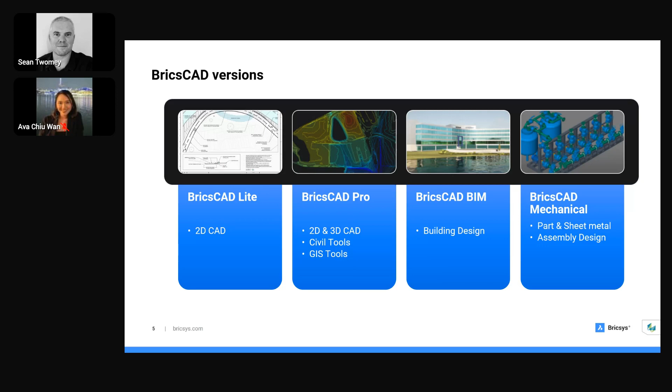With that in mind, let's talk about local government and what it means. As I said, I'm based in Australia, so I work most closely with Australia and New Zealand, but I'm very aware that we've got a very broad audience today. Even within Australia and New Zealand, there are some significant differences.

We've got district and city councils in New Zealand, but local government also includes regional authorities who manage things like water networks and general services. Whereas in Australia, government is divided into federal, state, and local. Local government doesn't include state policies, so things like water provision are handled by state government, not local government. There's no perfect formula to cater for everyone's government needs.

What we're doing is showing the concepts, and today's session will be one of the more basic ones. We're happy to do a whole session on water because we have a very extensive GIS platform, and we'll get the opportunity to discuss that and provide feedback.

Moving on, what we're talking about is councils, who take care of everything from health services—we've all had immunization recently from COVID—as well as cultural facilities and community services. What we're showing in terms of road design is just one part of what councils do, and we're very aware of that. We're also aware that mechanical and BIM products are relevant here too.

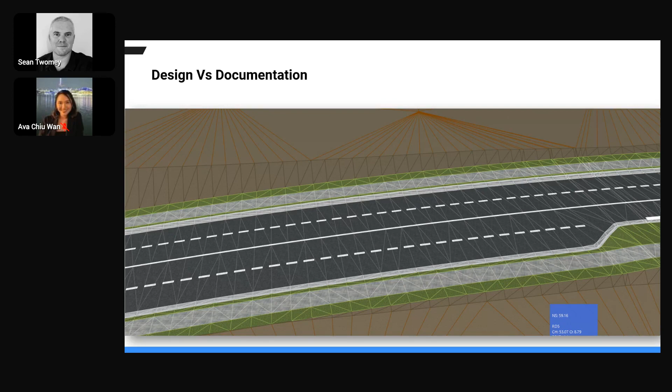If we go to the next part of the slide, we'll see the same information in a 3D format, but all the documentation is obviously in the 2D plan. So standard 2D CAD tools tend to be a very important part of this, and we'll do a demo in a while to show that.

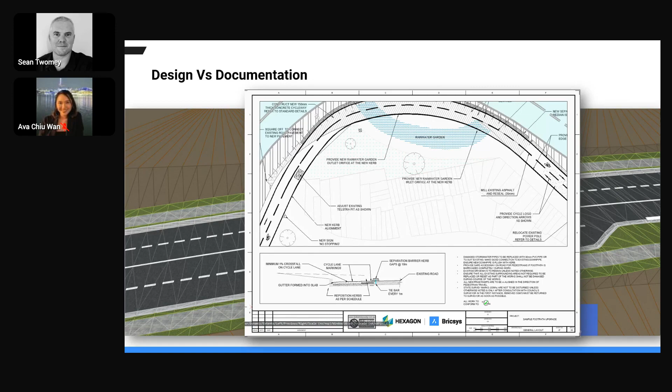But just to position where BricsCAD fits into all this—general usage of BricsCAD, or CAD in general, tends to be based on some very basic features. Probably the 5 most popular things for standard documentation usage are blocks, line types, multi-leaders, and tool palettes, which Ava will show, as well as using snapping tools and polygons, etc. The general fundamentals tend to work through these.

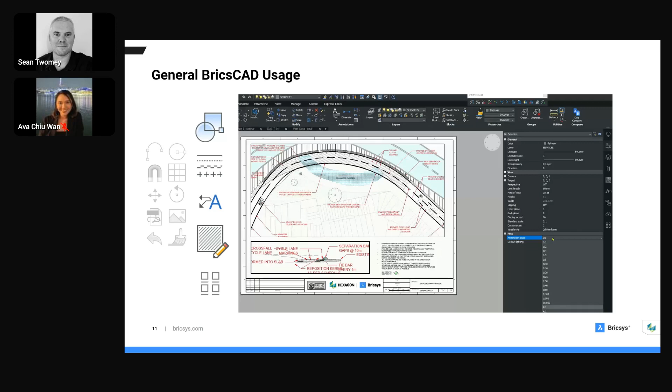Let's quickly mention those—I don't want to spend too much time on the PowerPoint. If you think about line types and layers, we've got a slide showing how we use those. These behave exactly as you'd expect in the CAD platform. What we're showing here are different line types and colors for different services—electricity, sewer, water, etc.—all defined in these layers and line types. We often get asked how we manage existing CAD standards.

So if you've got other CAD platforms, we read DWG natively and we write DWG natively.

So the existing standards port across. We can do a separate session on this, we've done a few of these on how you work with those existing standards, but let's just mention the fact that we can do those. If you want more information, please let us know.

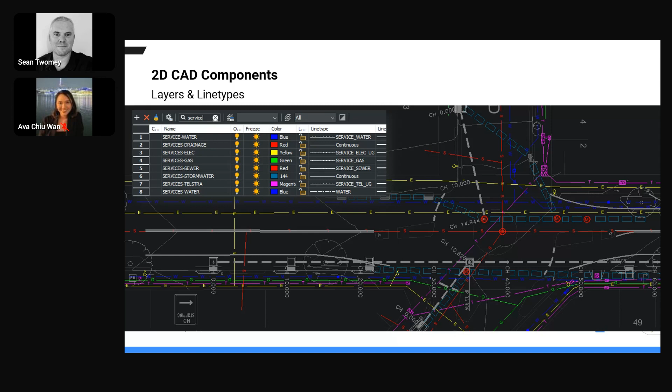In terms of blocks, we've got a few examples on the next slide. You've got a standard detail here from a bioretention. We also have a traffic intersection showing basic blocks for give way signs, standard road signs and everything else. These are obviously going to be different in each location, but the concept of using CAD blocks is native to us. We read those files in natively, so existing block libraries can be read directly, not even imported.

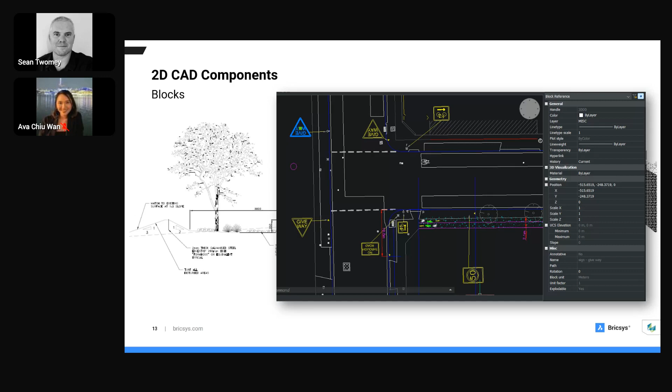The next thing we mentioned is leaders. Leaders are a huge part of the documentation process, and things like multi-leaders with annotative text and all the various parameters around that are a very important part. So we show those and how easy they are to use.

What we find is that sometimes non-CAD specialists want to do a basic site plan or a general layout. The fact that the tools are easy to use and intuitive makes a big difference, because people tend to have the knowledge and just think the CAD platform is a bit too complex if you don't use it every day. So we make sure we build up palettes, which Ava will show in a second, to make that easy.

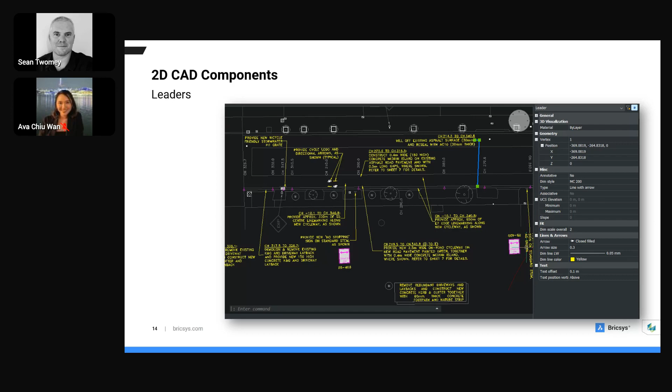Again, they port across from other platforms and behave exactly as you'd expect. The last thing we'll mention before turning over to Ava is that viewports work. When it comes to plotting, we could do a whole session on how we manage sheet sets and various types of CTB files, which all come across. But let's just mention here that viewports work as you would expect, and we can easily do various scaling options as well.

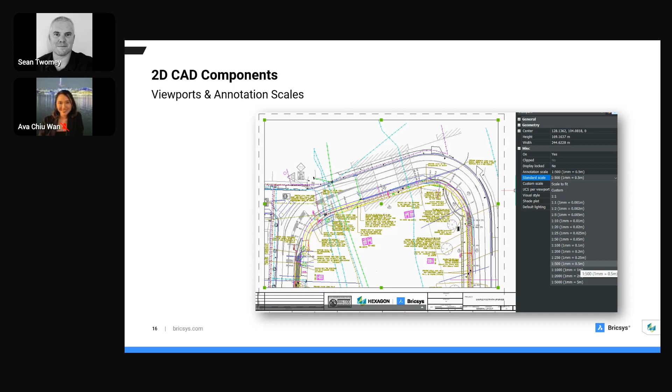So let's move on to a quick demonstration. Just to frame this, the scenario here is that rather than doing a full CAD output and drawing everything manually, we're going to take an aerial photograph and highlight which areas of certain footpaths or cycleways need to be maintained, upgraded, or dug up and redone from scratch. It's a classic scenario where people have the knowledge in their heads and need to know how to put this down in a CAD platform.

The reason we're showing this is that we've seen people go to Google Earth imagery, take screen captures, and put it into things like PowerPoint to draw on it there. That works, okay, but it's easier to do in BricsCAD and more accurate, and you get a better result. So with that, let's ask Ava to take the stage and take us through this presentation.

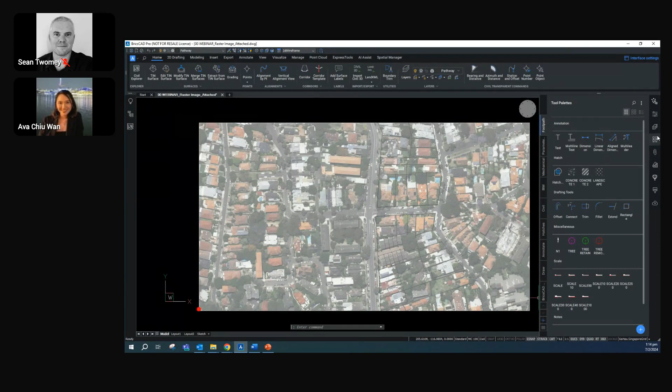I want to start with an aerial photograph that I have attached in my drawing using the image attach command. If we launch this command and bring in this raster image, we have options available like adding geocoding information, or you can also specify your insertion point, scale, and rotation.

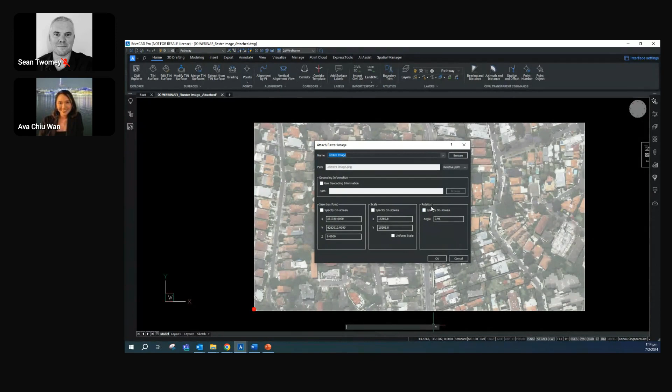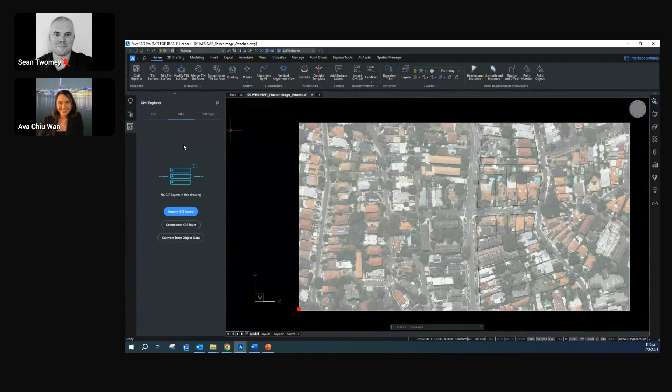Going back, say you have GIS data for this area and you want to bring that in for reference. You can also import your shape files. In this case, I have my road network, so I can just bring that in with one click, and the data comes in as expected.

So when does this become useful? Sometimes you also have your utility lines like electricity or telco lines, or maybe even water lines. You can bring in those shape files too, and this will be useful for your alignments or coordination with other departments or contractors.

If we go to the GIS tab in the Civil Explorer, we can open this roads layer and see a consolidated table of the GIS information that we have. For this one, we have the names, the classification, and the max speed available.

If you want to filter this, you are also able to do so in BricsCAD, and you can stack your filters here as well. It works with an AND and an OR function.

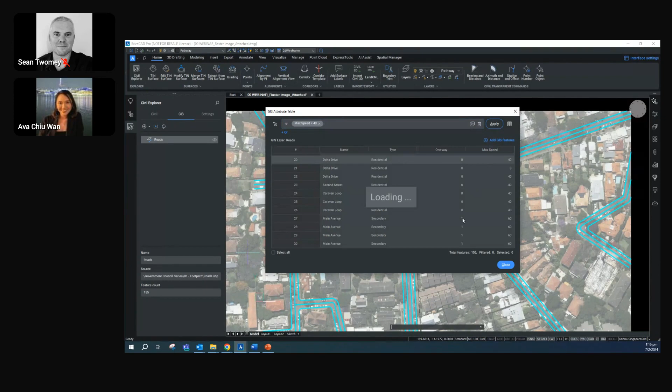This will be quite useful if you want to sort through your data. As we all know, perhaps your GIS data can vary with maybe 100 or even thousands of entries in a single layer, so once we do that, we can easily sort through our data here.

So we have here some lot boundaries on some of these areas where the footpath reconstruction will be.

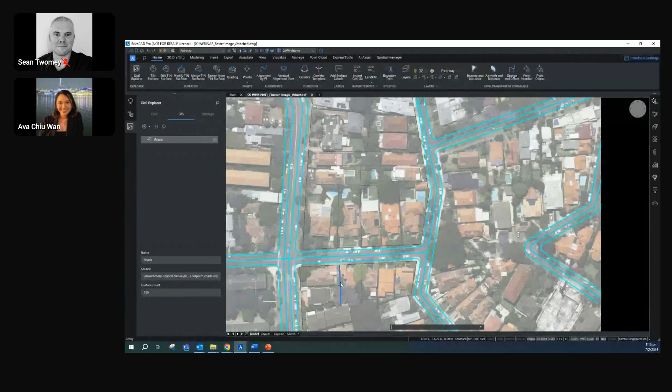You can further ease your workflow by creating your own customized tool palette in BricsCAD, like what I have done here. We can create this according to the usual tools we will be using for our workflow to make it more accessible.

We have here some annotation tools, some hatching tools, some drafting tools, which will be very handy in a little bit. And of course, we also have our scale bars, amongst other things.

You can easily add your text, your separators, and create new palettes, and even customize your palette here. You can also add your tools from here as well.

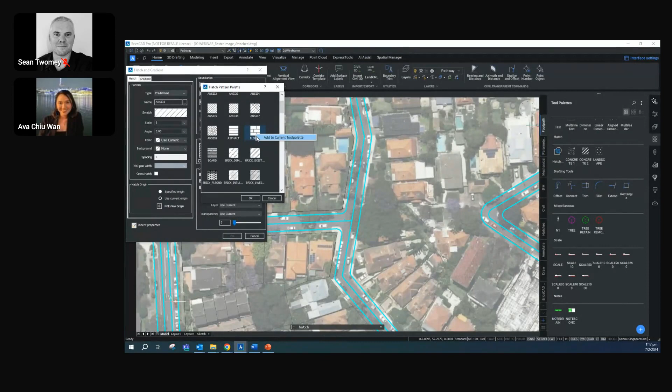If we go to our hatch tool and look at the swatches that we have, maybe the brick hatches will be quite useful for today's workflow, so I can easily add that into my current tool palette. You see it is now added here, and I can drag that in together with the hatches and all my other hatch patterns.

Because we have GIS data attached to our data, when we click on any of these lines and go to our properties panel, we can see the GIS data attached to it. From here, we can easily identify what street we are working on and add in the corresponding labels for our sketch plan. For example, we can see that this is 2nd Street, and here we have 10th Avenue, so we can proceed to add in our labels with our text.

In this case, we know that this is 2nd Street, so we will just label this accordingly. I'll add in 2nd Street over here.

Let's try another one where we want our text to be parallel with the street. For this one, I'll just specify this as my rotation angle and then proceed to type in my label as well.

Let's first turn off the visibility of our GIS layer so we can focus more on the detailing of our footpath.

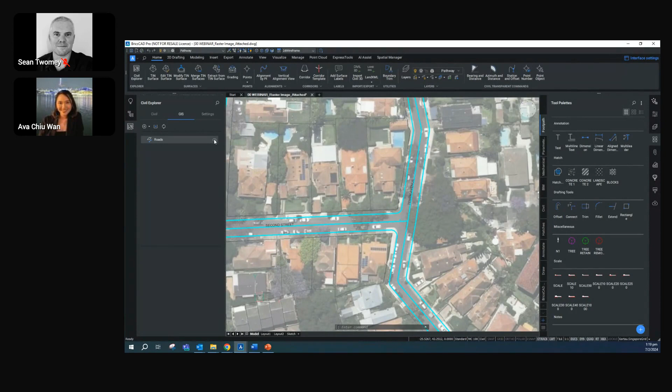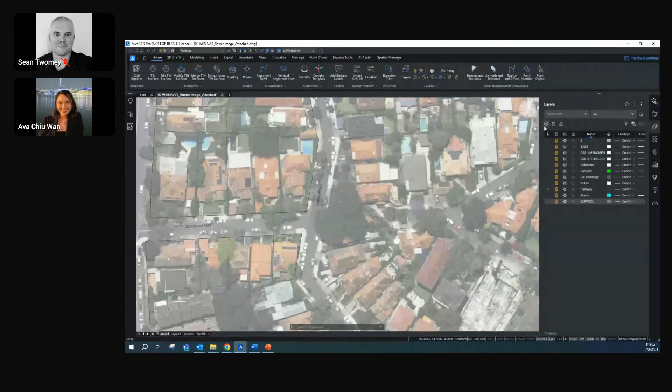Now let's check on our layers to make sure that we are drafting on the correct layer so that we can easily sort out our elements. I will use pathway as my layer and proceed to do all my details here. Of course, if you want to add a new layer, you can also do that in this panel.

Now we can use the lot boundary as our guide for the end of the private property and the start of our footpath. Depending on where you are across the world, the minimum width of a footpath can vary from around 1 or 1.2 meters to 3 meters or more, especially if there is also a cycling path provision. Assuming that for this street, the design states that the footpath shall be 2.4 meters.

So we will do an offset of the lot boundary by that much, and I'll do that on these sides as well. Since we see that this is probably a primary road, perhaps this might have a footpath that is wider, maybe around 3.5 meters. Let me do that again here and once again here.

So let's connect these corners and make it rounded using the fillet tool. Just select these two and do that once again to the other three corners that I have over here.

Again, I will use the lot boundaries as our guide, and we can use the extend command to extend these lines as our basis. Notice that as I hover over the line that I intend to extend, a blue line comes up as a preview, so we will have an idea of how it will appear.

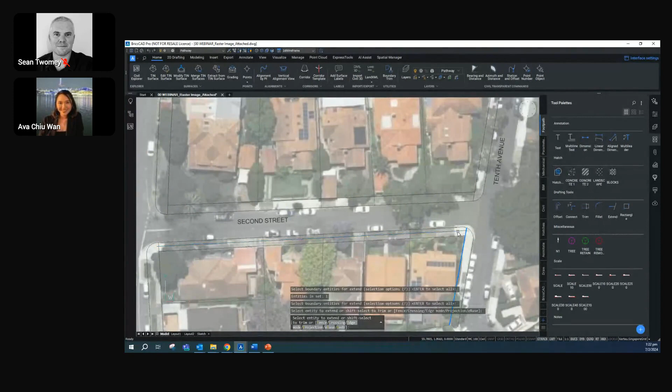And if I want to extend this further, I can also do that simply by just using my tool palette over here.

All right, so before we start with the hatch pattern and labels, let's take a quick look at this legend that I have over here. As you can see, these hatches will probably be used the most in our workflow, and we have added these hatch patterns over here in our tool palette, rightfully so.

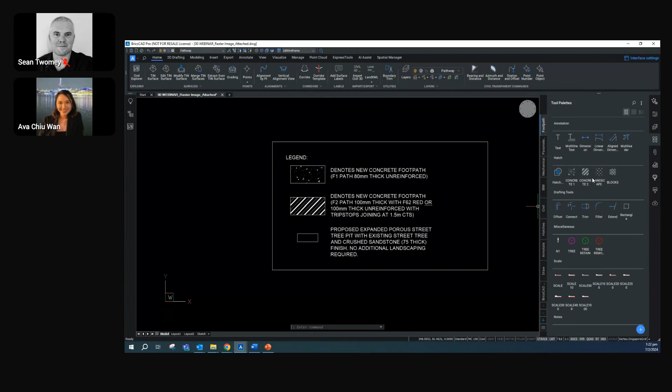So I will add in some lines as my markers, especially on some of these driveways that would not be included in the reconstruction. I'll just add some lines over here, and I don't have to worry about making sure that these lines will be perfect, or that I'll be able to close these lines perfectly.

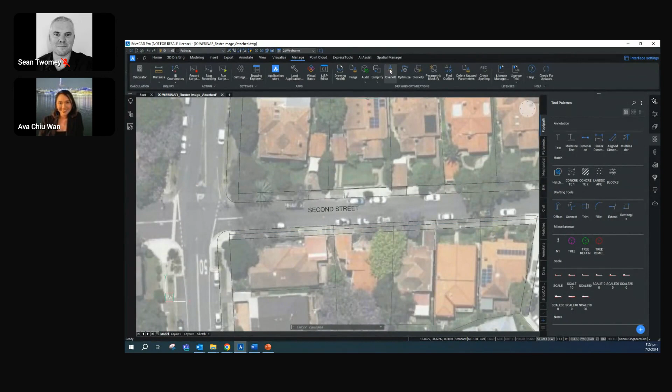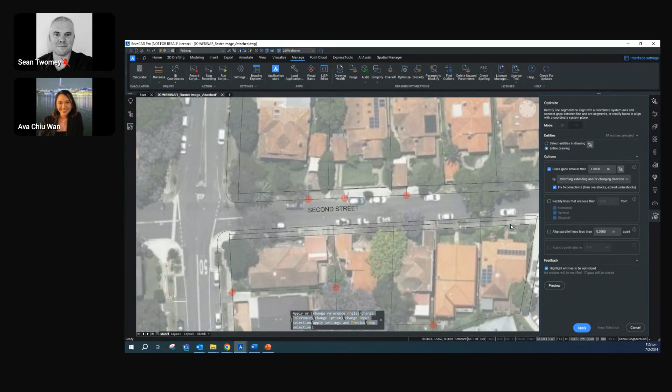Because we have drawing optimization tools in BricsCAD, like the Optimize tool, this can take care of my open gaps or some other skewed lines, depending on what imperfections you have in your drawing. It can easily identify the gaps or misalignments based on the tolerance level that you specify, and this will help us rectify these things.

As you can see, based on my tolerance level, it can see that 17 gaps will be closed, and this will highlight the items that will be closed for easier identification. So once I hit apply, you can see that there are 17 gaps that have been closed now.

So let's say that based on the discussions that we've had with other departments, it has been agreed that these areas will be an F1 path, so we can go ahead and add that hatch pattern in. Just easily select these, and we can easily add in our hatch patterns here as well.

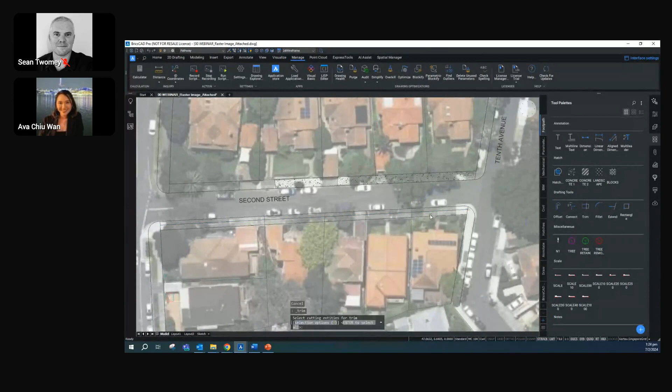So for this side, since this is an existing verge, I would want to trim some of these items as well. So if I want to trim some of these, I can easily do so, and then proceed to add in my hatches as well. Let's say for this side, some of these areas will be an F2 path, and some will be an F1 path.

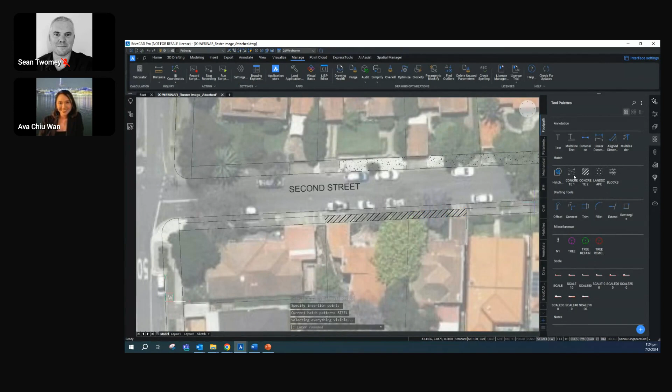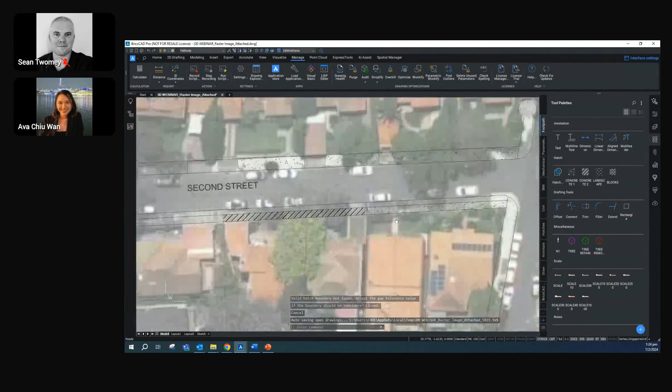So I can just easily do that in BricsCAD, and it's very accessible. I no longer have to go through the hatch command, since all my tools are already in my tool palette.

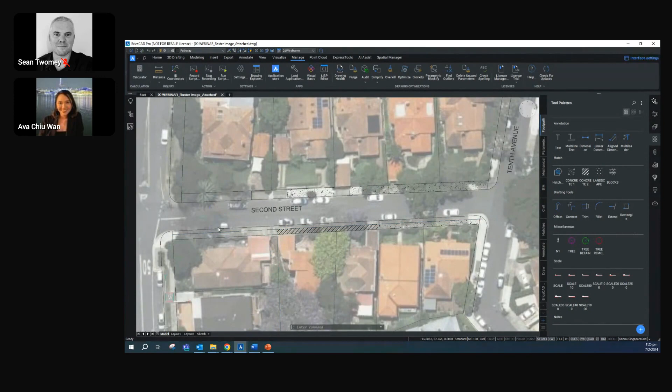So we have, as you can see, there's a number of existing trees that we have here, and we need to determine which ones are to be retained, removed, or any proposed alterations to be done. So we can start with the proposed tree pit for existing trees.

If you notice, the boundaries that we have here are not really parallel to the X and Y axis. So we can use dynamic UCS and lock that in to make sure that our tree pit is aligned with the boundaries. Using the dynamic inputs, we can also input the dimensions or the areas of the tree pit that we have. Let's say we know that this tree pit will be about 3.5 meters by 1 meter, so we can just add that in here.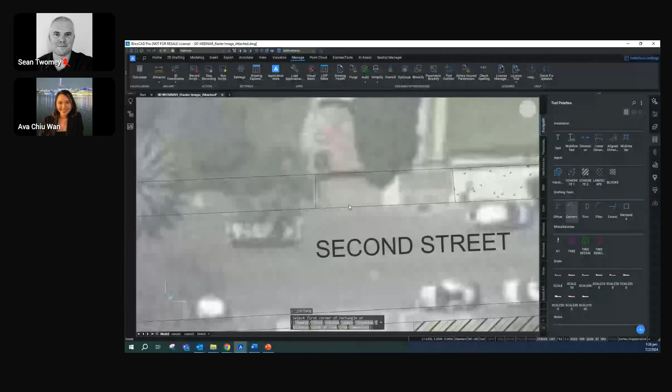Let's try to do another one on this side, again locking in the dynamic input. Maybe we have a tree pit that might be a bit shorter, 2 by 1 meter. So we can just add that in.

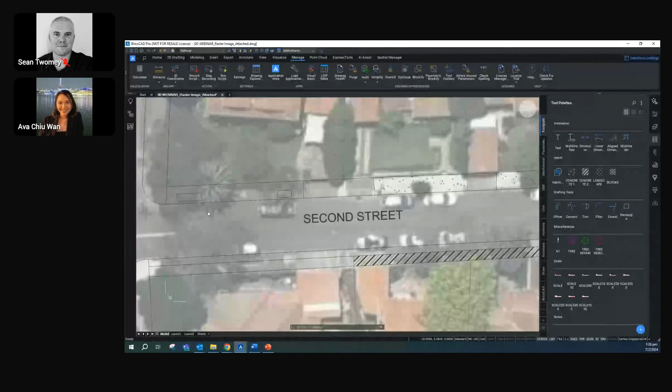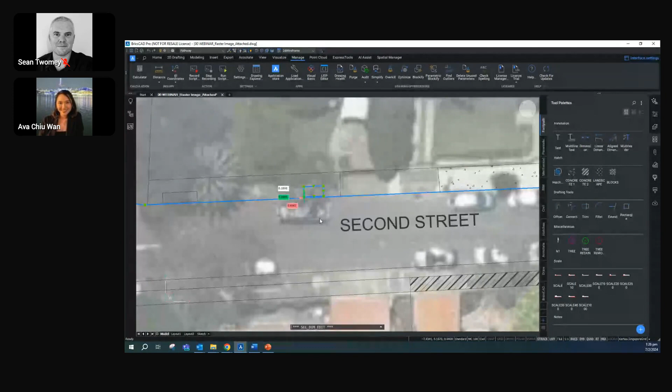At any point, if you want to do quick checks to see if the tree pit is spaced correctly from the edge of our footpath, let's say I want it to be just 0.1 meter away, I can just type that in, and BricsCAD will intelligently move our element over to 0.1 meter away from the edge of our footpath.

So then we can also mark the trees to be retained. And in cases where you got approval of the tree removal, you would also want to reflect that in your plan. Let's say I want to mark the ones to be retained in green, here, and mark the ones to be removed in red. Maybe we have 2 over here.

Since these are not reflected in our legend, we can add labels to help avoid confusion. Of course, the last thing that we want to do is to remove trees that were actually meant to be there in the first place. I'm sure that Mother Nature would not approve that.

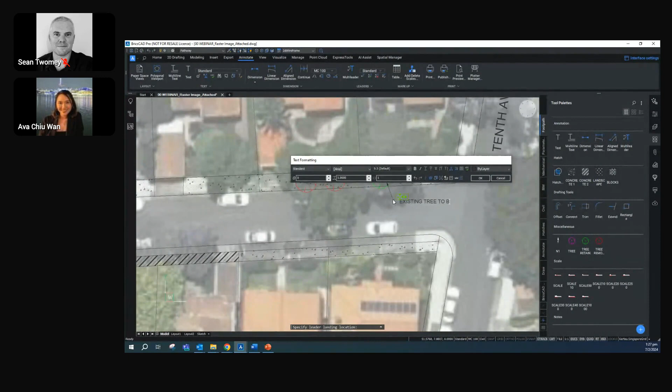So let's add in our labels. Maybe we can say existing tree to be retained. And perhaps for this side, we can add in existing tree for removal.

To minimize our labels, I will just add in a leader for this side to help make it look a lot more organized and clean.

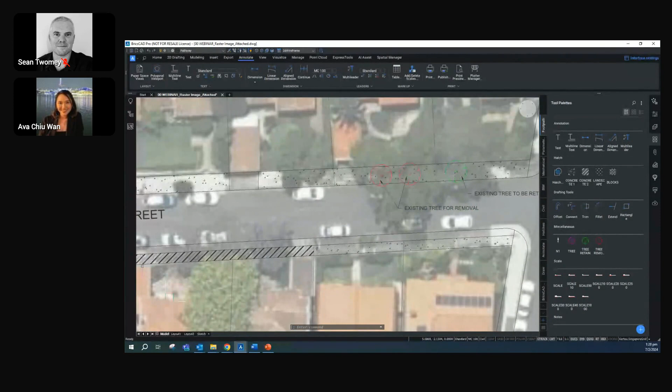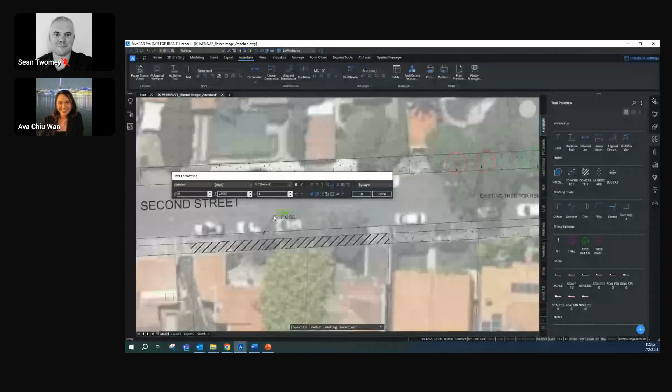So let's wrap up our plan by adding some dimensions and annotations. I can add in annotation here to show that this is an existing verge that will be retained. And they can add in their landscaping as required.

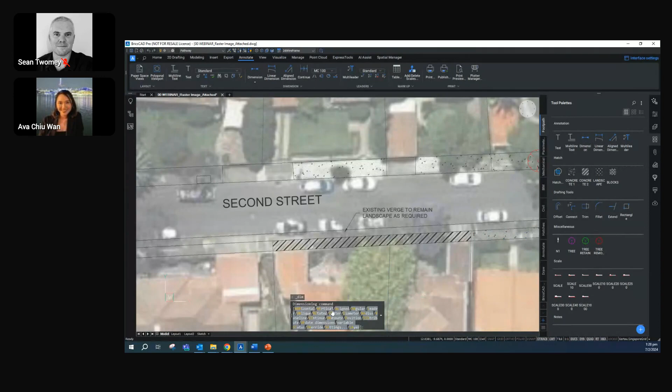Now we can also add in our dimensions. At any point, if you want to change your dimension styles, you can easily do that in BricsCAD as well. Let's say for here, I want to use this dimension style. If I want to change this, I can just go to my status bar and change my dimension as well.

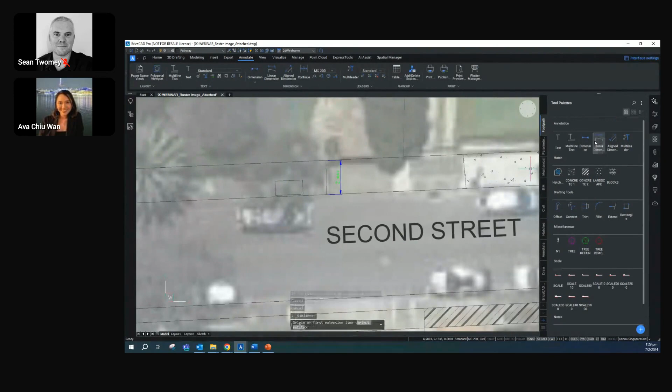So let's try it out. Let's add in a linear dimension for here. And if we want to add in more, we can also easily do that in here as well. If we want to move this around, we can easily do that. It's very, very accessible and user-friendly.

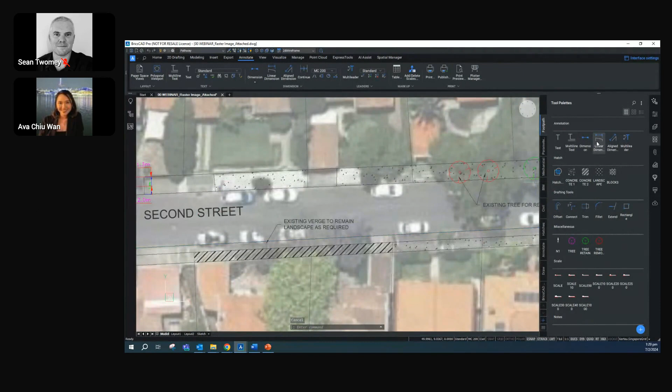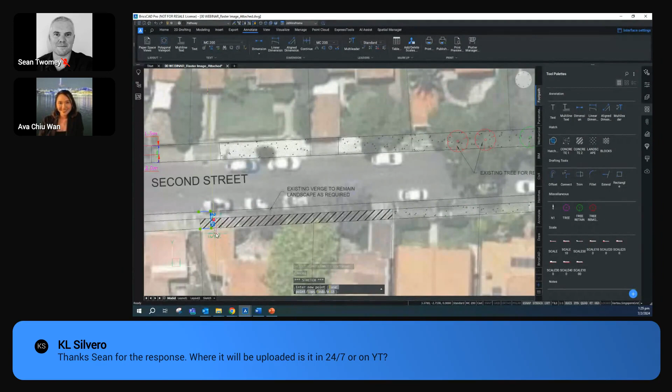So let's try to add in some more dimensions on the other side, just to help us with identification. Lastly, let's add in our true north for reference.

So once we are done, we can move on to the paper space. As you can see, we have our title block here. And what we would want to do is to create a viewport.

You have various options in viewport creation, like the usual standard rectangular ones, or if you need to create 2, 3, or 4 viewports. In this case, I want to create a polygonal one so that I can make space for my legend.

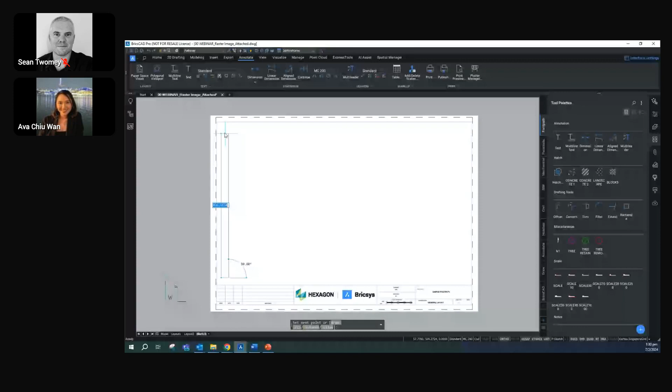So let's just do a quick viewport over here. And you can then proceed to zoom into whatever scale that you need.

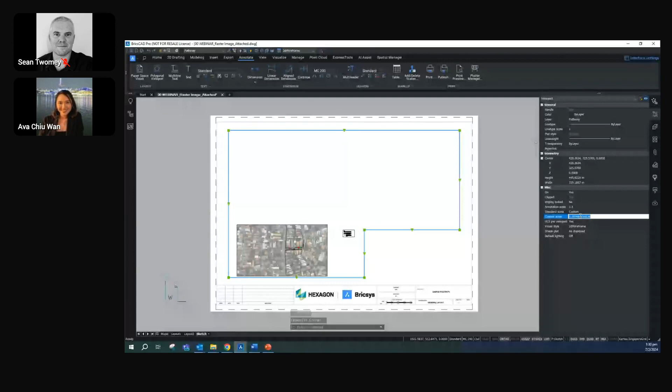Or you can also go to your properties panel and type in a scale that you want. Let's say for this one, I want to type in my custom scale, this will be 1:100. Let me do that again. So here, since we have it here now, we can just type in our custom scale.

And then we can proceed to just reposition that anywhere that we would prefer this to be. So let me just create another viewport for my legend.

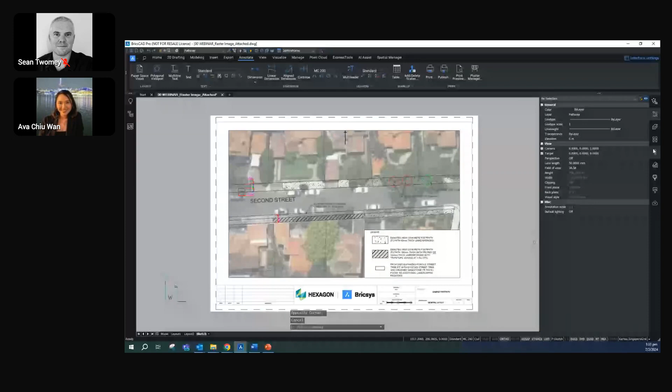So since we know that our scale is 1:100 over here, we can just easily add in our scale bars, which I have also added in my customized tool palette. So here 1:100, and we can just add that into our drawing.

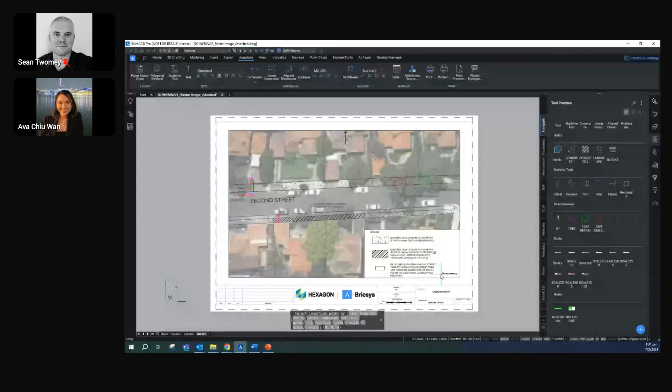Then if you need to print this as a PDF, or you need to plot this, you can easily do that as well, like how you normally would in your workflow. So let's do a preview of this one. And as you can see here, we have done a sample of how it would look like over here.

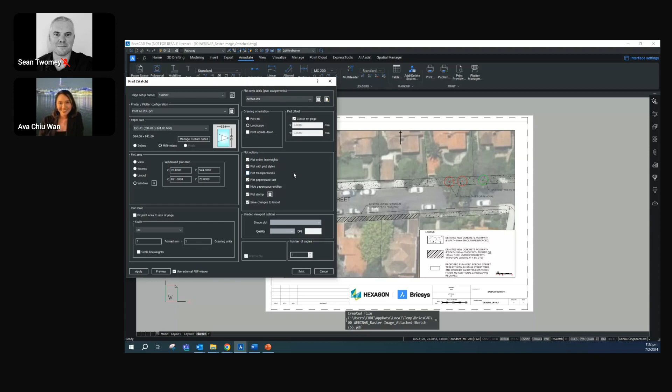Of course, if you have your own plotters or pen assignments or any plotter configuration, you can also use that in BricsCAD according to your requirement. So this is a quick taste of what you can do or how you can create your labels, your hatch patterns for your plans, like your schematics or your sketch plans here in BricsCAD.

So before we move on to the next demo, we would want to have some polls for you guys.

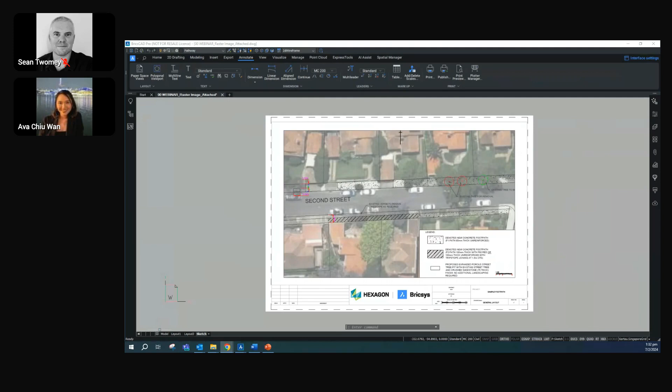Cool, so thank you, Ava. Super good to see this. I think what's most important part of that presentation is the fact that there's functionality that we know exists that can be put into a tool palette. So the occasional users will have a whole workflow defined for them. It's a good example of people who don't use CAD very often having a proper environment to let them do what they need.

So in terms of the polls, we'd like to just ask you a few quick questions to get an idea of what's happening. So let's start off by getting an idea of how often you use CAD. So let me launch this poll. If I go and run this poll here, do I have to open it first maybe?

Okay, so we can see we got quite a few everyday users, and we got a few rare occasions and a few weekly users. That's cool. That gives us a good idea of what's happening. And look, if anybody has other variations on this, please type them in on the questions tab or the Q&A tab, because we're keen to get as much feedback as possible.

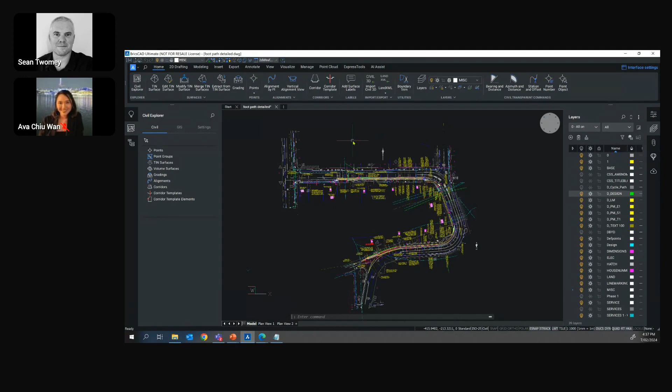This job is a slightly more complex version of what Ava was showing, but it's the exact same concept. You can see it's really just more leaders, more text, more details, but the same process. We're not going to show how we did all this geometry, we're just going to look through it and show some highlights. But the point to emphasize is that once it works for the small job, the same process works for a larger job. It's just a question of putting in more information.

The hard part tends to be knowing what to type in on these notes. We find that people have that expertise already, they just need to know how to access it, hence the whole value of the palettes.

We mentioned, and we saw people said, that they work with civil objects quite a lot. We do have a whole bunch of options for TIN surfaces and volume surfaces, etc. We won't show those today, but they are on the Civil Explorer, so let us know which of those you want to see and we can come back to them.

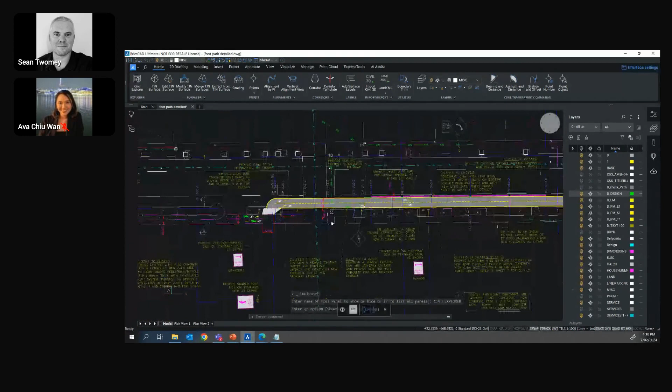Ava already mentioned and showed how the GIS side works. On this file I've got some layer groups set up just to show how things work here. If we look at the strings and services, we can see the GIS layers have already been imported here, so we have the water layer, the sewer layer, electricity, etc. These give us exactly what we need.

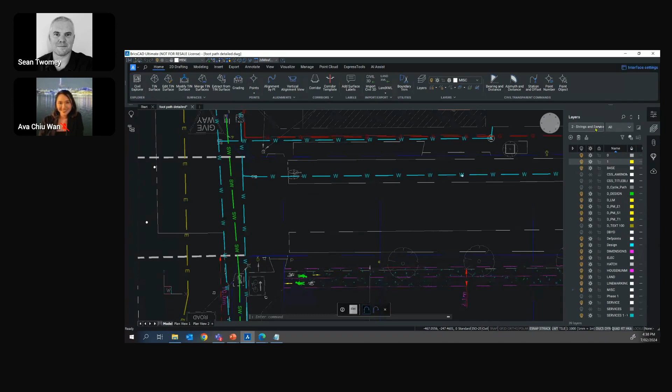We'll also see that the general layout is a road that's going east-west around in a kind of a U shape, and what we're doing fundamentally is adding a cycle lane onto this. So this is our cycle lane here in yellow, which we'll show in a second, and we do have a whole bunch of annotation on this as well.

So let's do a few things here that are not in the standard CAD platforms, because what we were showing earlier was how we do things you would expect to see from a CAD platform. But BricsCAD's got a few unique features that I'd like to show in a civil engineering context.

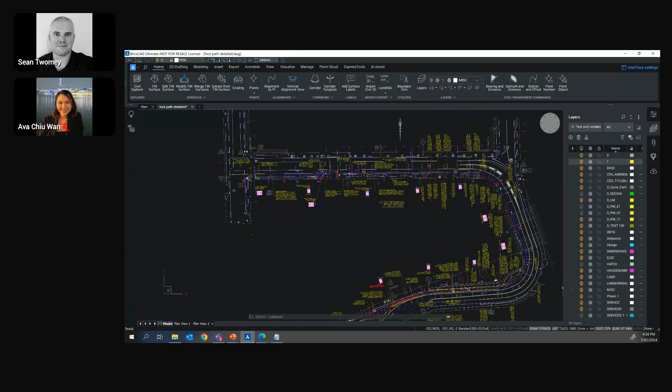Many of you may have seen Blockify and Copy Guided on architectural plans. Let's very quickly run these on the civil engineering scenario. If I go to the outer strings only layer here, you can see we've got a series of geometry types that represent a power pole, but they've been exploded, or it's been scanned from a PDF, and it's all individual lines. If we were to upload this to a theodolite, it would be quite difficult to work with.

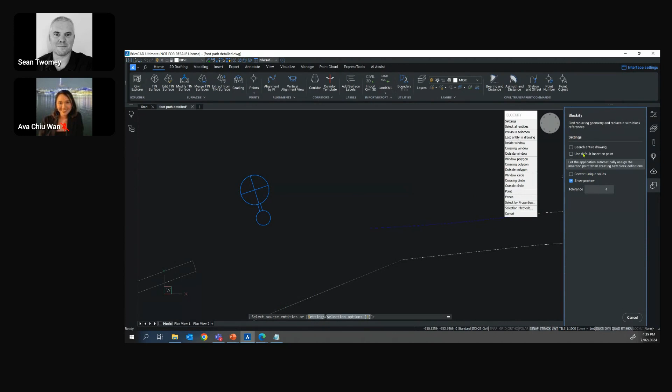What we can do is type in Blockify. This will allow us to select the geometry, and it's going to find all instances of that geometry around the drawing and convert them into blocks. So I'll untick these options so I can type in my own insertion point, my own block name. When I press enter, I get prompted for my insertion point, which I click on here. And I'll say search the entire drawing. The block name I'll use, I'll call it electricity pole 1.

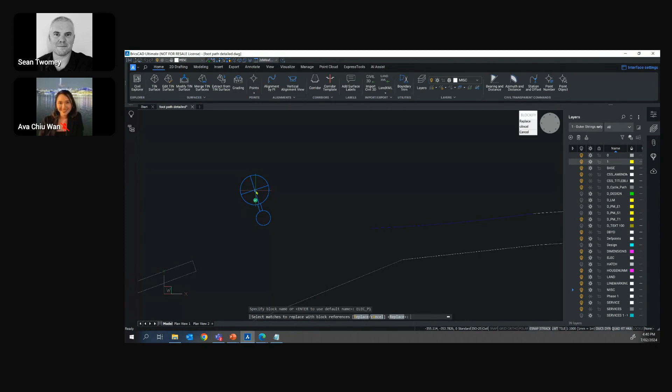So what we see now is the green tick mark on all the instances of that geometry around this drawing. I could go anywhere I wanted here and untick one that wasn't relevant, but you can see how easy it is to now convert all those into blocks. So if I was now to upload this to a theodolite, these will come across as a single point, which is exactly what surveyors want.

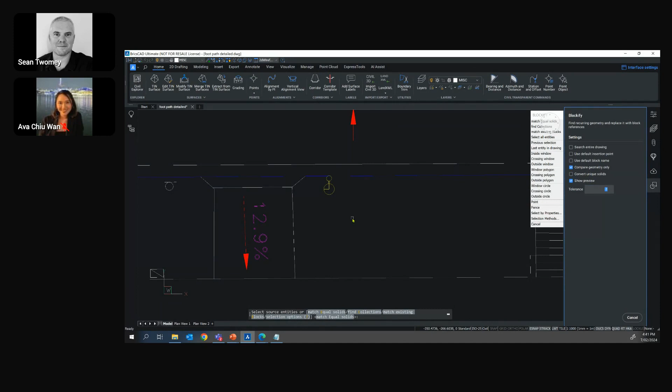That's probably one of the more underutilized functions in BricsCAD. We've got quite a few variations on it, and you can see on that panel, as well as the standard functions for typing in the geometry types, there's also what I call a tolerance factor or a fuzz factor, so that if it's been scanned from a PDF and we need to give it some tolerance, we can allow that, because the PDF scans aren't always completely accurate. That's one of our favorite functions to show.

The other one is Copy Guided. So let's just switch to the cycle lane only. It's sometimes easier to show this on basic geometry. So if this line here was the center line of our road, we want to copy a block or some text along that.

If we run copy guided, and if I select carefully, my item shows up in yellow and my reference object is in blue. So now when I copy here, you will see that as I move around the curve of that road, it is automatically placing the object at 90 degrees.

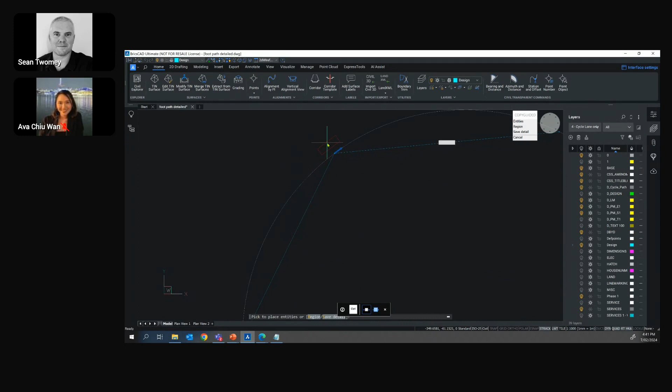So I can put it left or right, and as I do this, I can then change the distances too. If I select my road first and then my object, I can change the offset from 1.4 to say 1.8. That's easy to do with standard tools, but it's quite a few clicks. You've got to snap at 90 degrees and do a whole bunch of easy but repetitive features.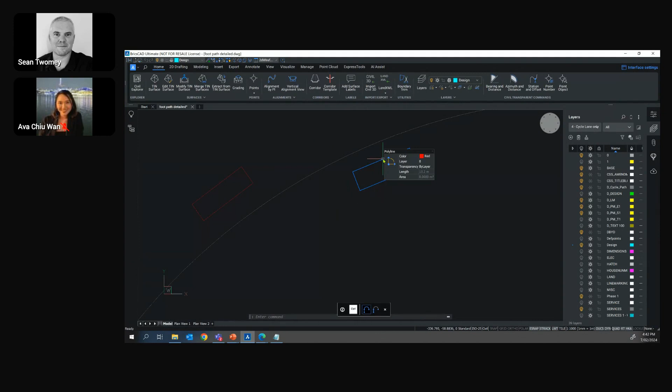And if you're doing these all day long, every day, it's good to have the automated functions. What I'll do next is hold this with a long left click so the manipulator shows up, and now I can drag it along that y-axis. You can see here I can graphically move it at various increments or type in an offset. What it's doing is just picking that local system for us, so I don't have to do my orthogonal snaps at 90 degrees again.

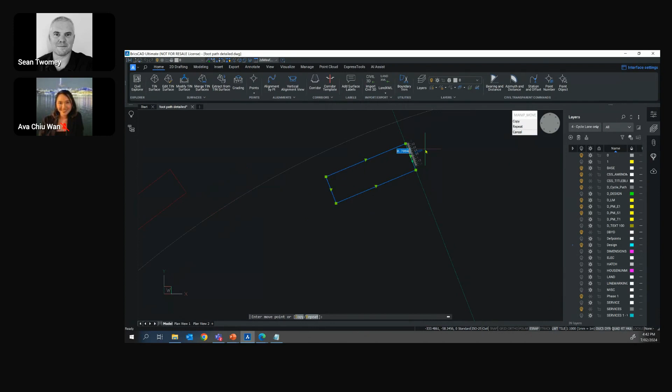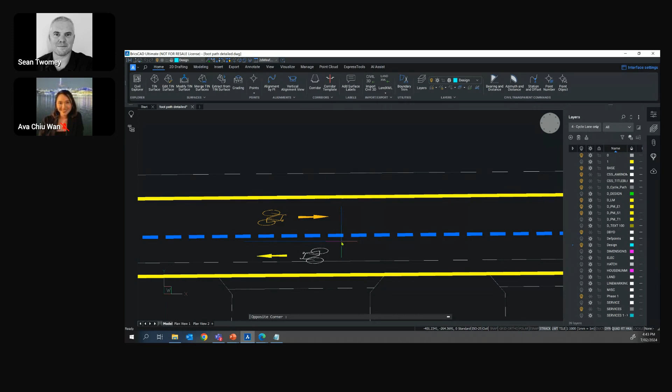So to run that on the actual real job, if I go here to this situation where we have the bicycle symbol and the arrow, if I run copy guided and select again, we'll click on the geometry and see our reference object, which is the center line, shown up in blue. So now if I move around this curved area here, you will see that we are snapping exactly as we should. So we can very quickly copy items and move them.

We find that when people get accustomed to this functionality and they have to move back to a different CAD platform, they don't like it. Because what this is doing is what we sometimes call quality of life improvements, because it makes your job easier for these repetitive tasks that seem simple, but if you're doing hundreds of these every day, it becomes quite cumbersome to do them manually.

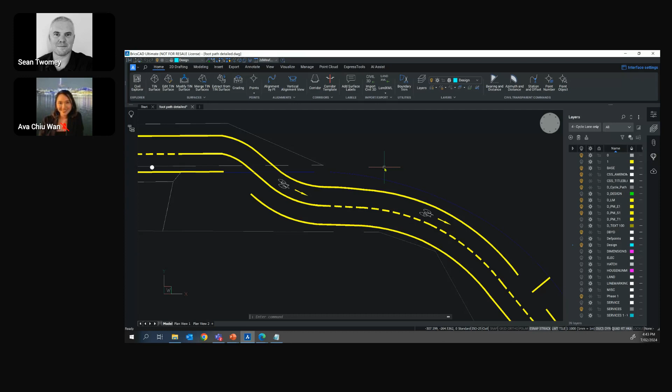Now, I think we're quite close to the end of our time, so let me just quickly show this entire job again, so you can see how much items would have to be copied here over time. So by having these functions, and by extending what Ava showed earlier, we can build up this full drawing.

I want to make sure we run the last poll. So that was our complete cycleway design.

By way of summary, we did start with the basic scenario, which I think is often the case, where people want to just take an aerial photograph and quickly put some hatch patterns and basic dimensions to show documentation of what needs to happen. Then we showed the full documentation version, where we made sure to emphasize the unique features of BricsCAD. The basics were just 2D, importing standards, and GIS. The enhanced version uses the Blockify commands, etc. The industry focus areas of doing more on GIS and more on civil tools, we can most certainly show you at a separate stage.

We got somebody asking about block redefinition. This is an interesting question, and we can do this very well. This is a bit beyond the scope of what we were planning on showing today, but let me just mention it super quickly. In the BricsCAD environment, if you type in Explorer, you will see a full list of all the blocks you've got here. Within this blocks panel, you can do quite a lot to control these. When you right click, you get all kinds of options. We can't show it today, but I want to mention it because it's a good question. Just be aware of it, and we'll be happy to do a separate one.

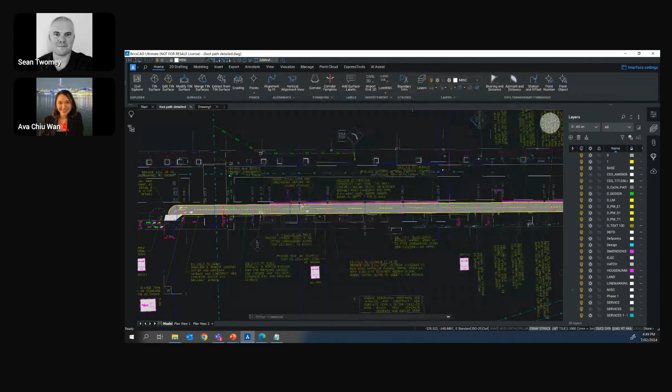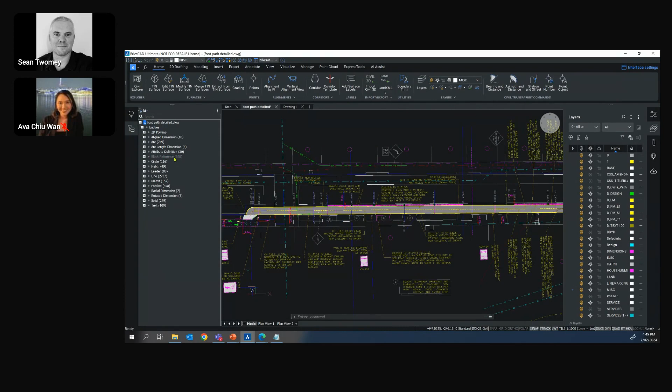The other point to quickly mention is on the structure browser here, you'll see a hierarchy of everything in this drawing. So if I wanted to, for example, turn off all my blocks and they weren't all on individual layers, I can highlight first of all my blocks here. Then I could right click and say hide all these. Or do the opposite, I'll show all these, right click and isolate them.

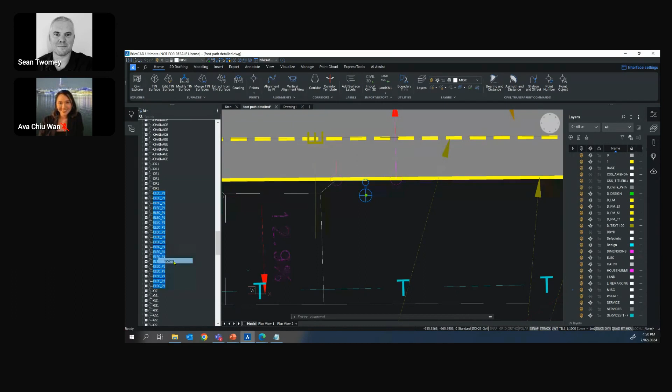So when we get files that need to be tidied up, we often use this process to automate it. Let's do one more example of that. Let's turn everything back on. I will select this block here, the one we just made earlier. When I select it, we jump to that in the hierarchy. I can now right click those electricity blocks and select isolate, so now we just see those electricity blocks we made earlier.

From the questions, it seems like there's people who do quite a bit of work with blocks. When you get drawings from external sources or that have been exported by other packages, you often need to do some tidy up. So we can do a separate session on this, because on the support side, whenever we get questions about drawings that are too big or not working properly, it's the Explorer and this hierarchy function that we tend to use to go through them.

Okay, we got a few questions on multi-leaders too. It's the same process as doing normal leaders. We can just attach multiple arrows to them to generate those.

We do a very comprehensive guide on how you migrate existing CAD standards into BricsCAD as well. A bunch of things will appear natively, and there's a few renaming basic parameters and very doable things that need to get done. We've got existing webinars on those, so if you search on our website for migration guides, you'll find all those. We can send you the links too.

Okay, so it's copying settings from two machines. I won't have time to go through it properly here, but when you go to the profiles command—I'll type in profiles—we've got a profile manager here, the user profile manager. It's on a different screen, let me just drag it across. You can see how these profiles get set up here. So if I was to make a new one and call it webinar, then go and export that and import it to a new machine.

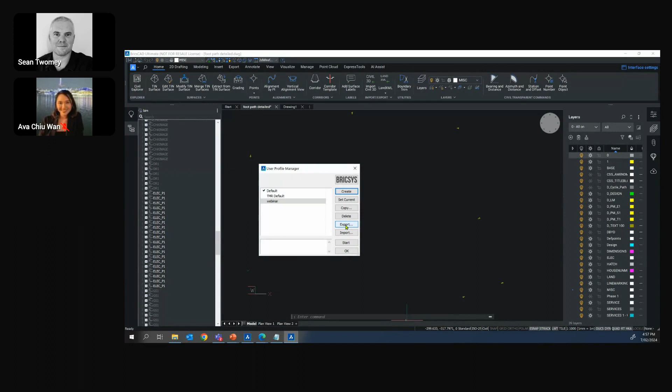Now it will need more files as well—it's not just a profile file, but you can easily compact those and transfer them across different machines. I won't do it now because we've only got 2 minutes before this session finishes, but we can certainly take that on board. I think we may be about to finish up here.